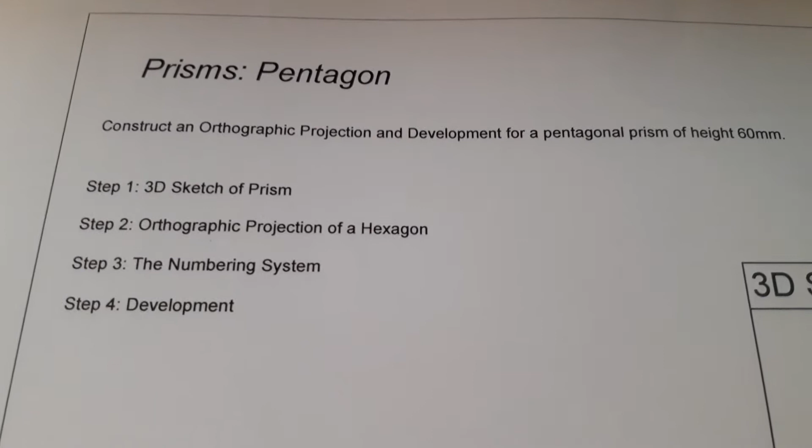So here we have part 2, 3D geometry part 2. We're actually going to start working out the exercises now. So let's see, prism's pentagon. Yes, it's a pentagon. Construct an orthographic projection and development for a pentagonal prism of height 60 millimeters.

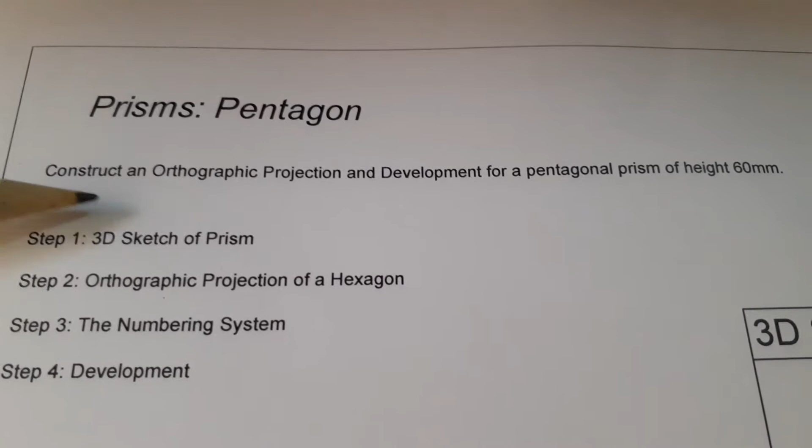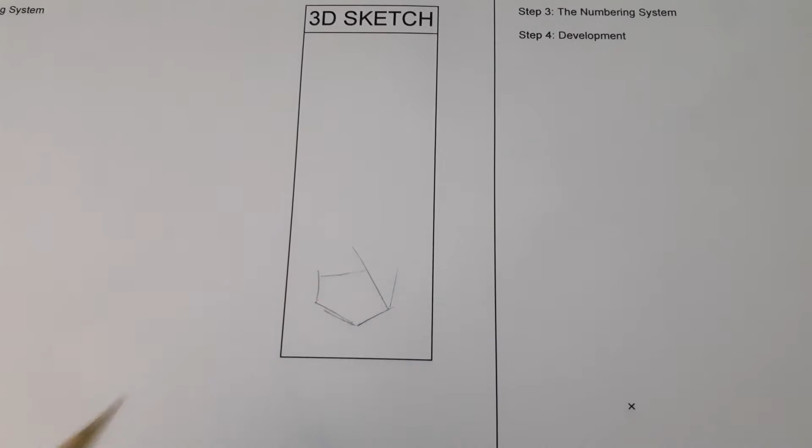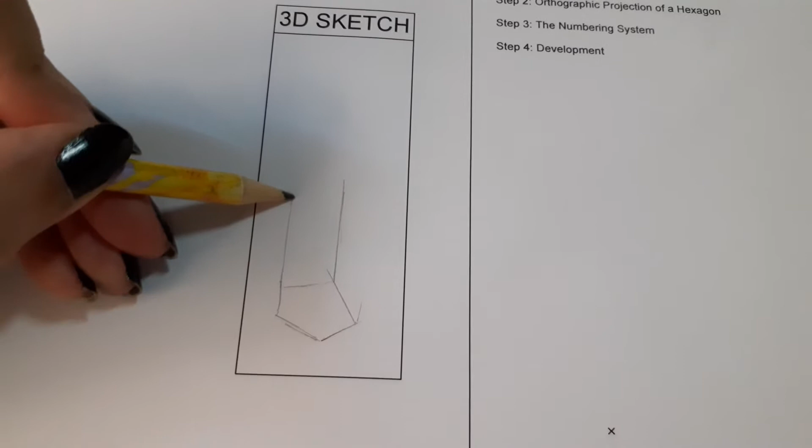Now step 1, you can do a 3D sketch of the prism. So here where you have the 3D sketch, let's just do a simple sketch. Make it as big as or small as you want, but make sure it's clearly done, okay?

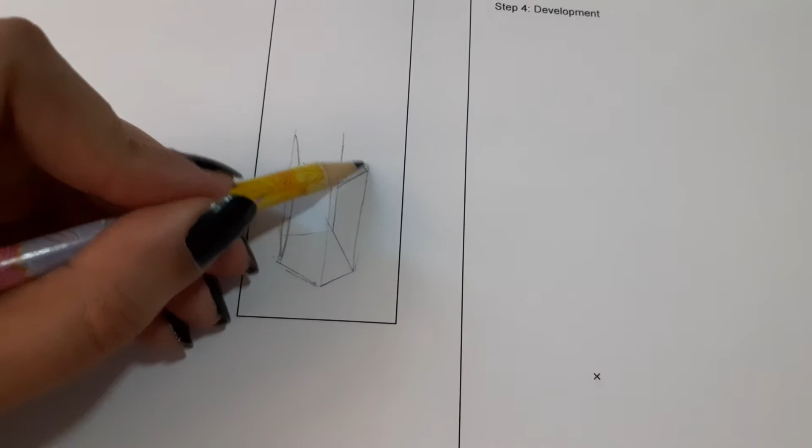So there I made a sketch of a pentagonal prism. That is the 3D version of the orthographic that I'm going to do. So first, from here, I'm going to leave a spacing of 15 millimeters. This one we always do in orthographic, remember? Always leave a spacing of 15 millimeters.

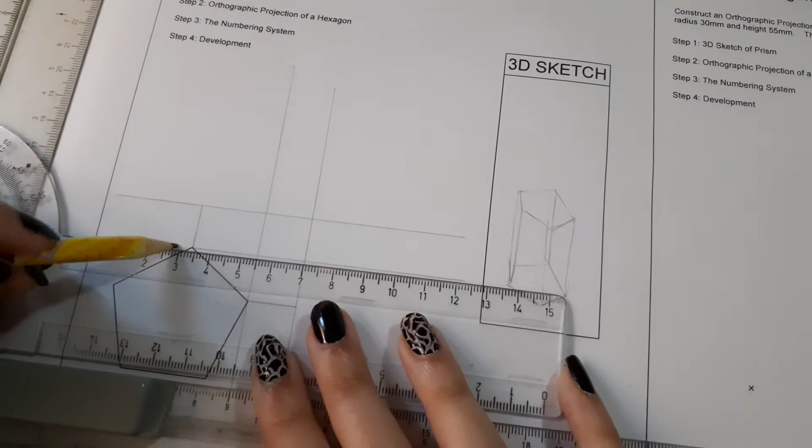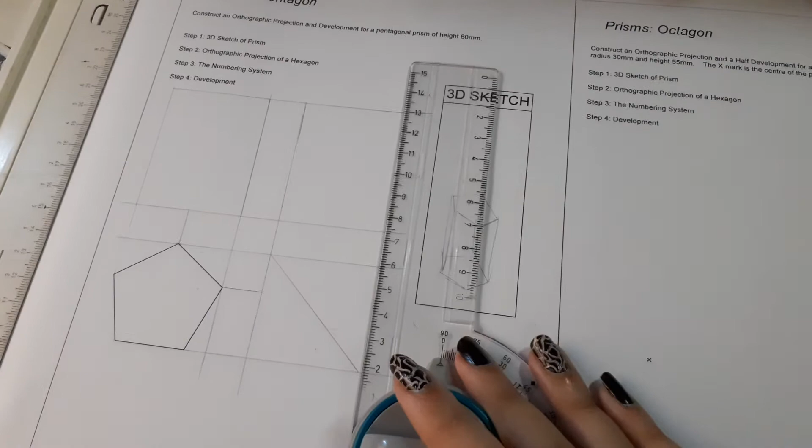If you think 60 millimeters is not going to fit well, instead of a 15 millimeter spacing, you can leave 10 millimeters, okay, we'll make an exception. You're going to have to divide it by 2 because some of you are printing it in A4. Don't forget the 45 degrees from here, okay? Till now, everything as per normal, normal orthographic projection for now. I drew the grid for a normal orthographic projection.

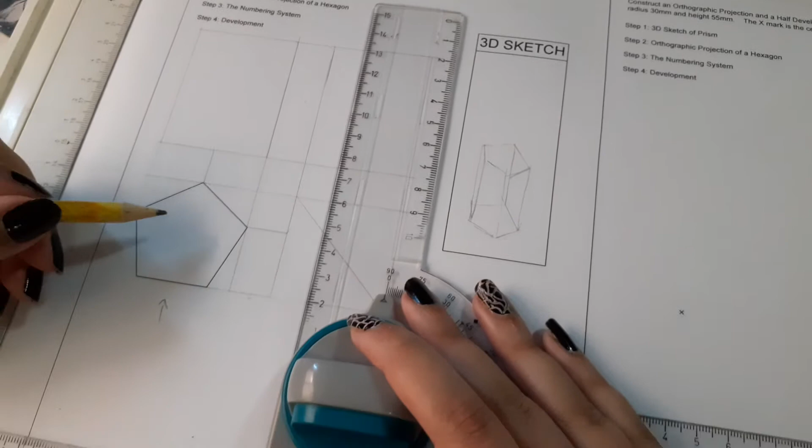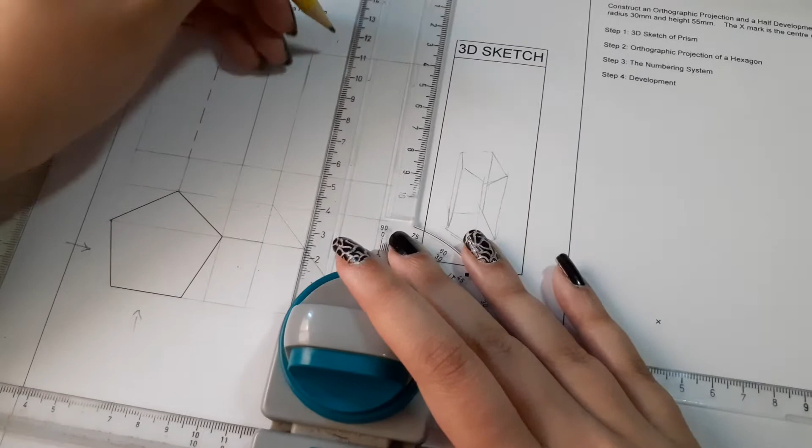Now, front view, I'm looking from here. So I have this line, but it's on the back, I can't see it, so I'm going to make it in hidden detail. When I'm looking from here, I can see this point. So this one, I take it here, and I make it visible here.

Don't forget to make all your lines, all the resulted lines, the answer lines, bold. Only projection and construction lines should be faint.

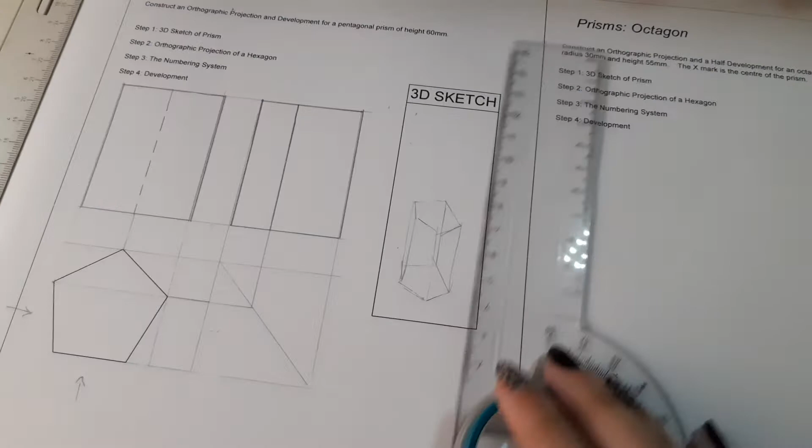And I'm going to give them numbers, 1, 2, you can give them numbers. Doesn't matter if you could start 1, 2, 3, but I started like this. It doesn't matter. So I know 1 is here for the front view when I'm looking from here. Look, 2 lines, when I'm looking from the front view I can see these 2 lines as well, so I need to take them up.

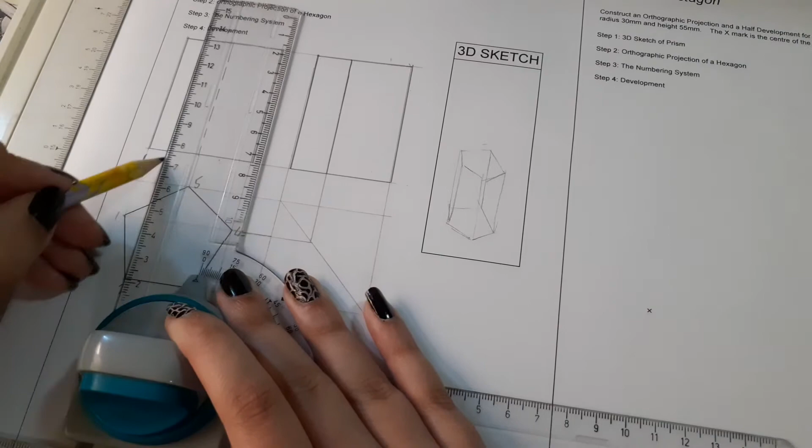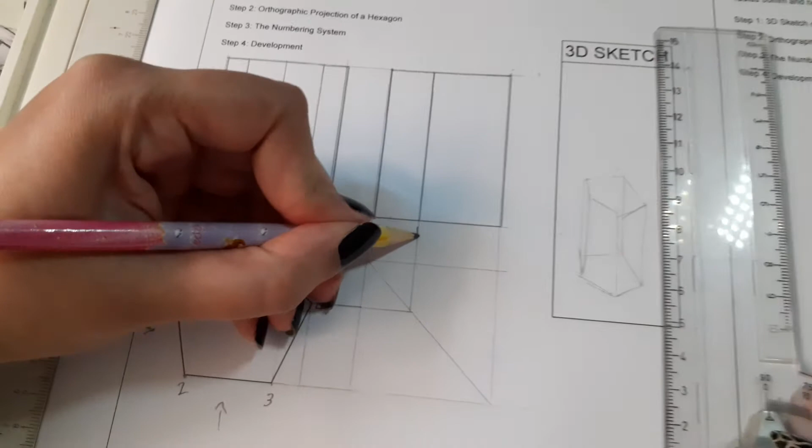I have 2 here, 5 here, but it's at the back so I can't see it, so I put it in brackets. 3 here and 4 here. When I'm looking from here, I see 1 here, 4 is there as well but it's at the back so I put it in brackets. I have 5 here, I have 2 here, and I have 3 here as well, I can't see it so I put it in brackets.

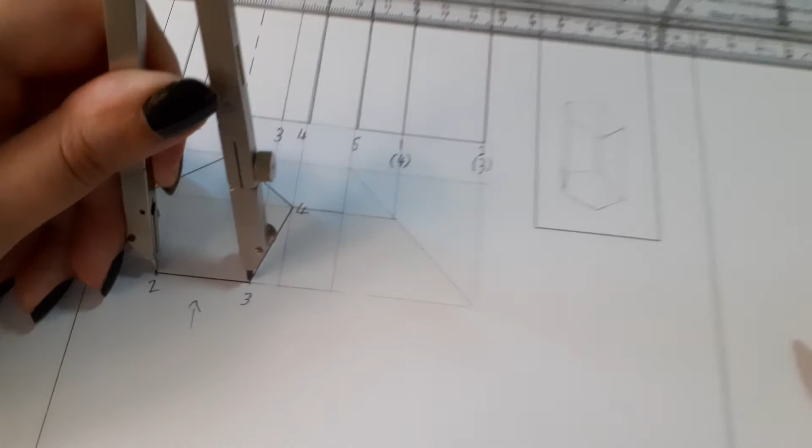Alright, so now the development is left. Development, I already have the starter line over here, look. So for the development, what I do for now is just extend the horizontal line, doesn't matter how long for now. Now, with your compass, you're going to open one side of the plan, one side of the plan.

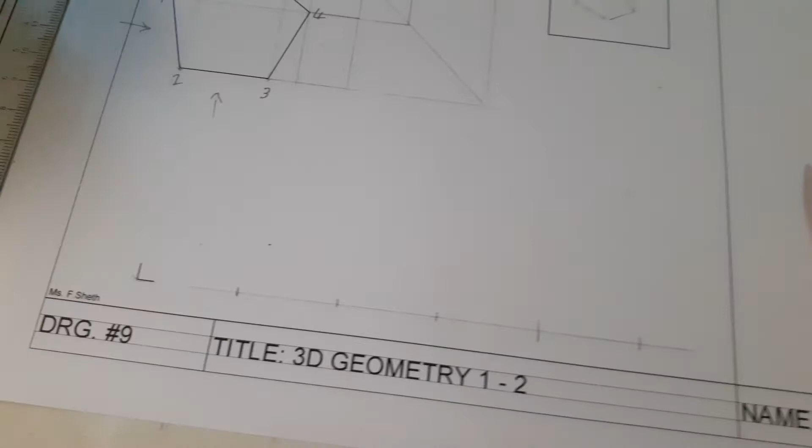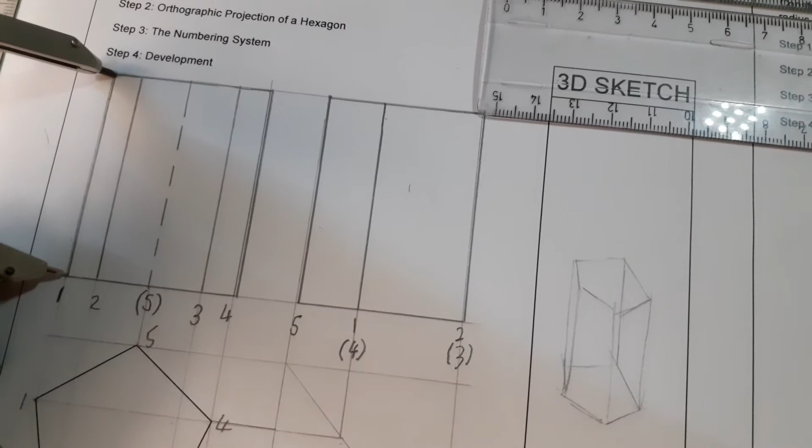You're going to go here at the starter point for the development, and this is a pentagon, so 5 sides, so I need to create 5 spaces. 5 sides, so 5 spaces. Extend this, doesn't matter how much for now, and take the length of the front view. Take this length, place it here on the development.

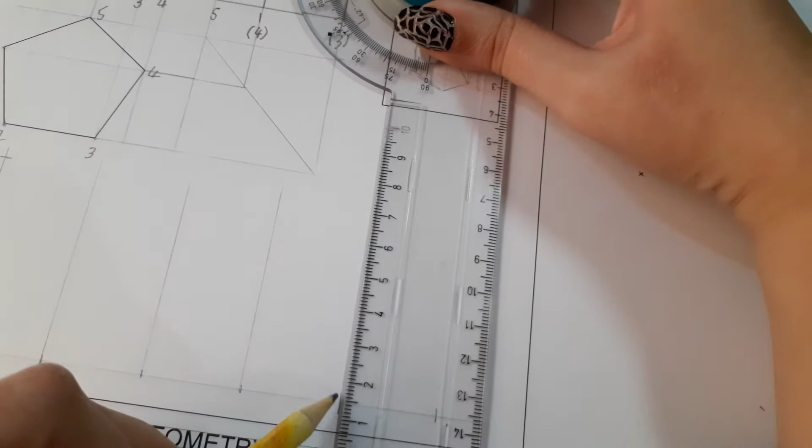Now, so that I don't stay putting this length on each one, let me show you what I do. I just extend these lines, and just extend the horizontal line from this measurement then, okay? This one you need to make it bold. Now, the lines at the end, so this line and this line will be bold too. And the line at the bottom bold as well.

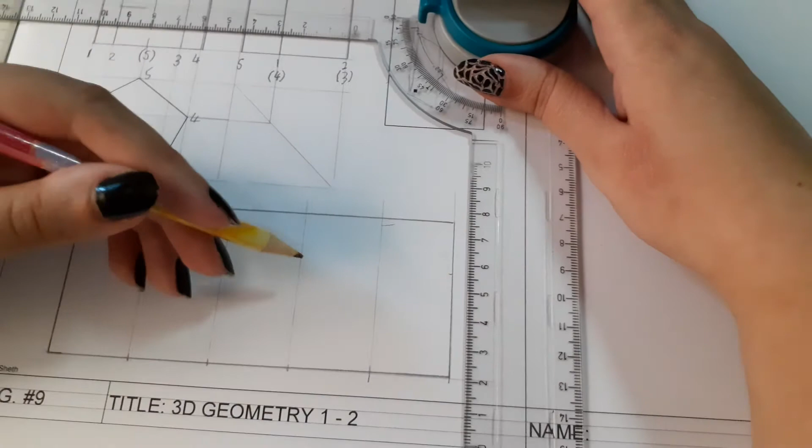And these lines in the middle will be folding lines. Folding lines, so one big line, 2 small ones. One big one, 2 small ones, okay? Look, 1 big, 2 small. 1 big, 2 small, do that. Folding lines, they're 1 big, 2 small. So if you require folding lines, you always draw them like this. 1 big, 2 small, 1 big, 2 small, 1 big, 2 small, keep going. 1 big, 2 small, 1 big, 2 small.

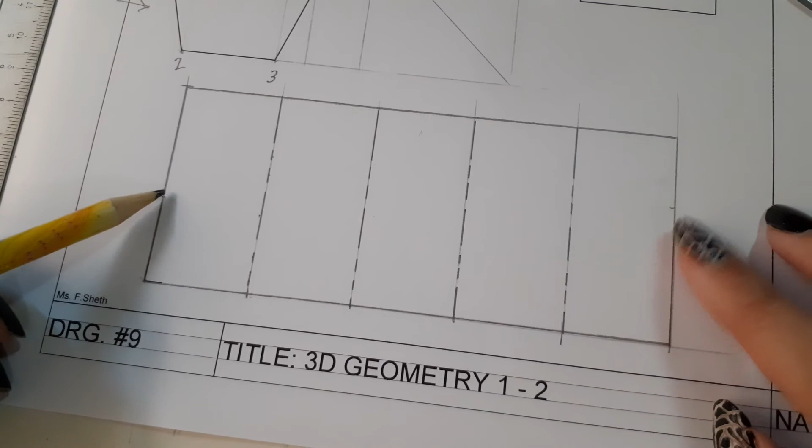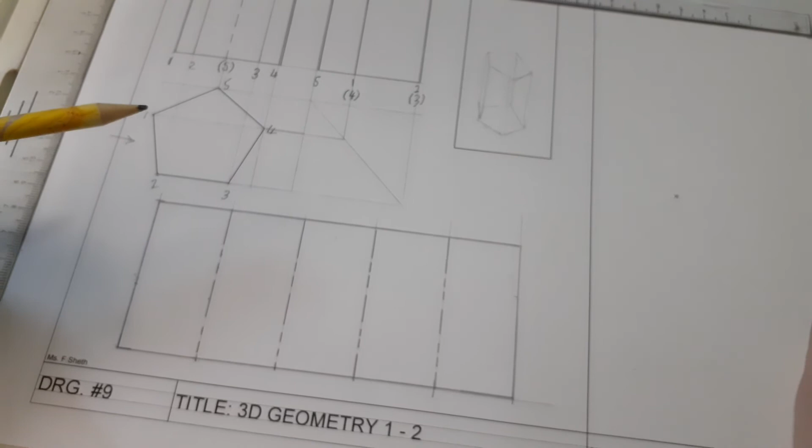1 big. Now you might ask me, why aren't these 2 folding lines? Because these 2 are not going to get folded because they're at the edge, so they just get joined together. So here's how we do the orthographic, everything as per normal orthographic, and here's how we do the development. So now, for the rest of the papers that are basic 3D geometry, that aren't truncations, you'll know if it's a truncation because it will be written up here. These are not truncations. The truncation ones have it actually written there, truncation. For those that aren't truncations, you can work them out now.